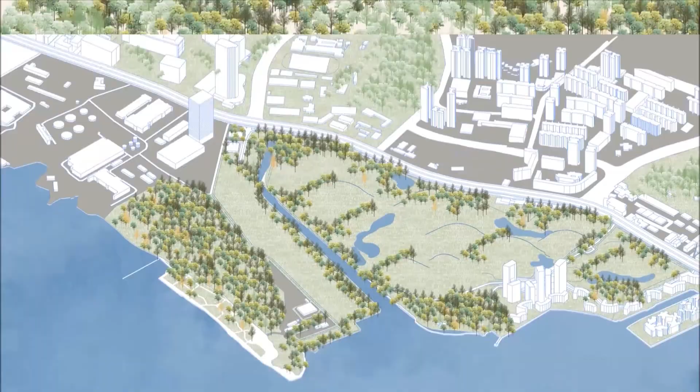The given site is located on the Greater Southern Waterfront, the south coast of Singapore, and consists of three main areas. To overcome the carbon problem, as the root of other environmental issues, we propose the approach: reduce, capture, then reuse. How do we reduce carbon?

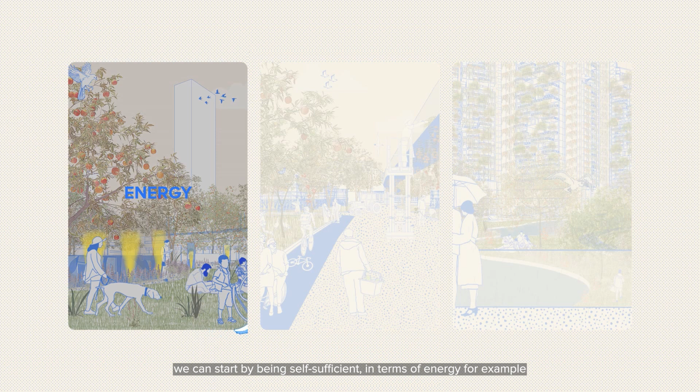We can start by being self-sufficient in terms of energy, for example. The exploration focuses on the building's orientation related to solar radiation and its opportunities to apply passive systems. The units are arranged with gaps to allow natural ventilation and lighting.

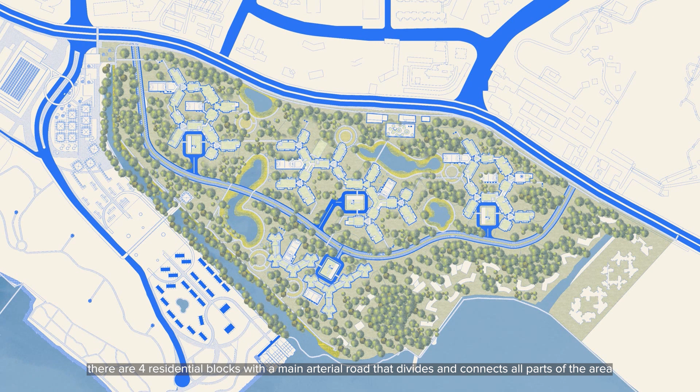There are 4 residential blocks with a main arterial road that divides and connects all parts of the area. The north side is for public housing and the south is for private housing. The concept of diversity and personalization is also implemented on the facade through solar panel application.

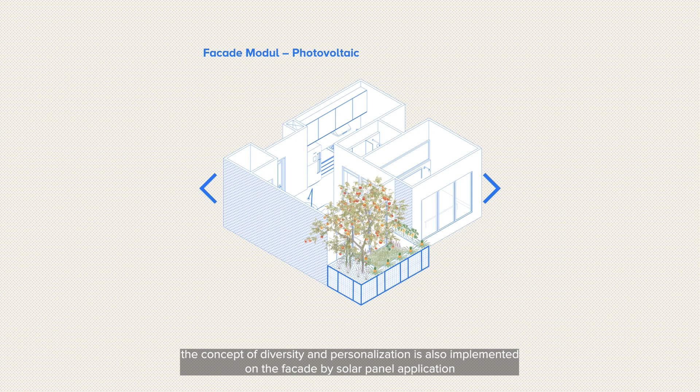Not only that, to meet the resilience scheme, the buildings are equipped with 3 cores that have a special function for distribution of water, waste, and food as well.

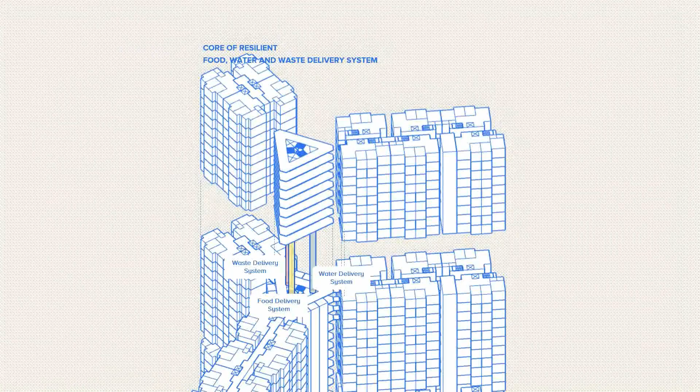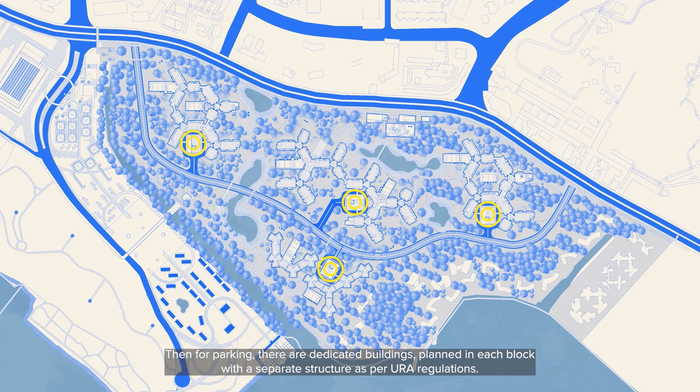Each tower is also equipped with various facilities spread over the podium area. For more dedicated functions, there are building facilities located in the middle area between towers, consisting of a playground area, maintenance rooms, sport fields, storage, and an area for vertical farming. Then for parking, there are dedicated buildings planned in each block with a separate structure as per URA regulations.

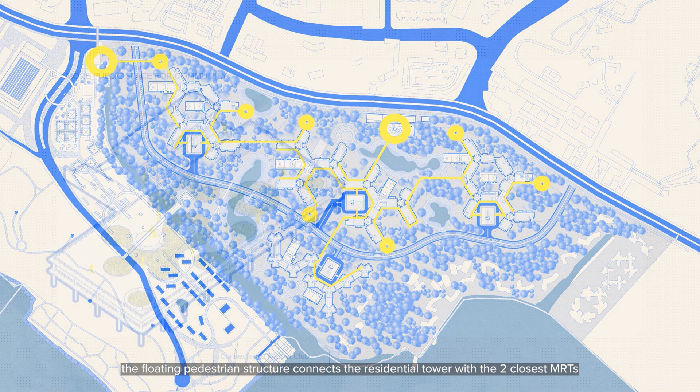We explore the design to consider future development and even function changing. It's then connected to the building at the pedestrian bridge level so it's more accessible. The floating pedestrian structure connects the residential tower with the 2 closest MRT stations. In the area that connects Keppel with the Telok Blangah MRT, there are food stall areas, playgrounds, and public spaces.

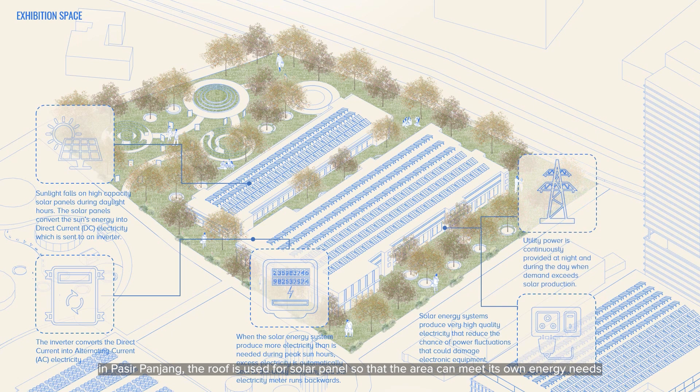In Pasir Panjang, the roof is used for solar panels so that the area can meet its own energy needs. As an exhibition space, energy requirements for installation and supporting display of other works can also be accommodated with this energy scheme.

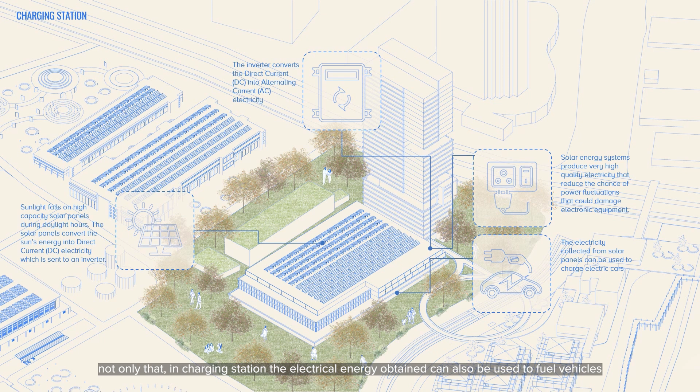Not only that, at the charging station, the electrical energy obtained can also be used to fuel vehicles.

The next aspect is the need for food. This is very crucial for Singapore, which currently imports 90% of its needs. With diverse design alternatives, including some units that have balconies, residents can adjust their preference to occupy daily needs through self-farm methods and a large terrace.

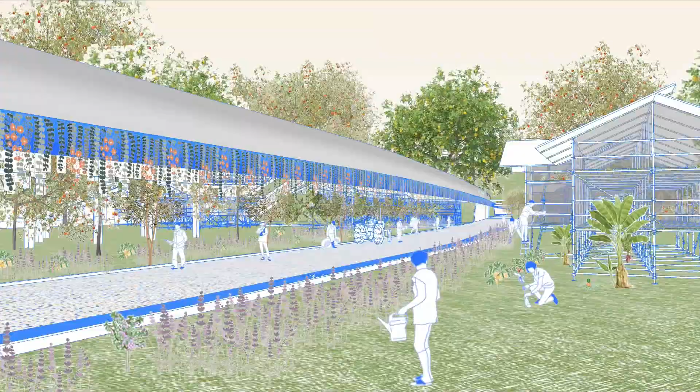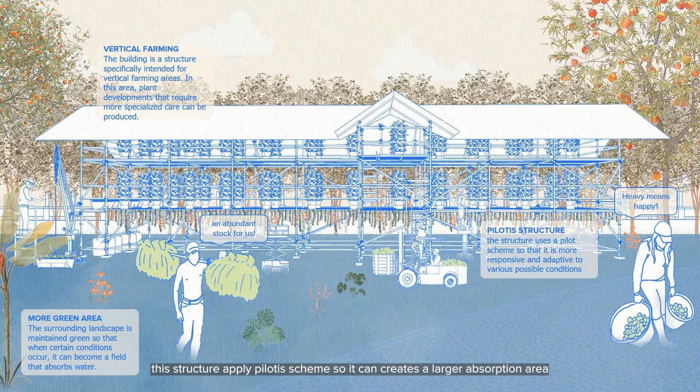On a larger scale, food needs are also supported by dedicated vertical farming buildings in the Labrador area. This structure applies a pilotis scheme so it can create a larger absorption area.

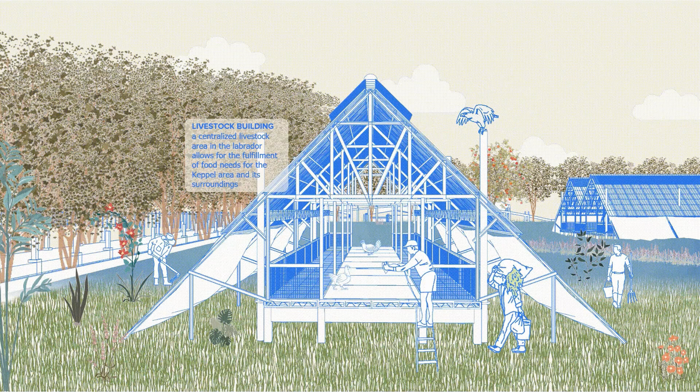Then for the livestock unit, accommodating chickens and pigs, the structure uses an amphibious scheme so that it is adaptive to various conditions that may be unexpected in the future, such as sea level rising and flood.

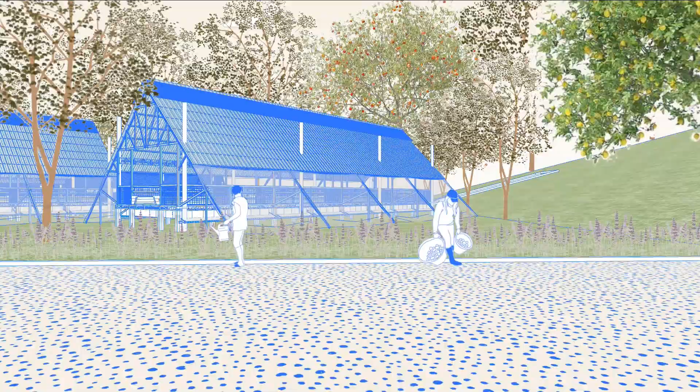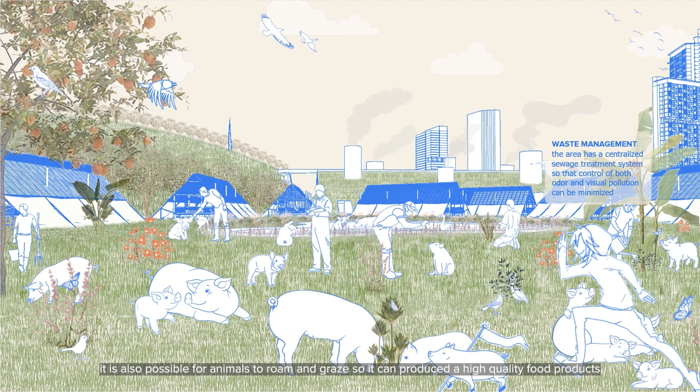With interactive media, visitors can access various information related to the site and the food scheme implemented here. It is also possible for animals to roam and graze, producing high-quality food products. Water, feed, and sewage systems are also particularly designed.

For marine protein needs such as fish, shrimp, and squid, the need is accommodated within aquaculture supported by a desalination scheme. The design is also equipped with a dedicated distribution channel using a conveyor line that covers up to the Keppel area.

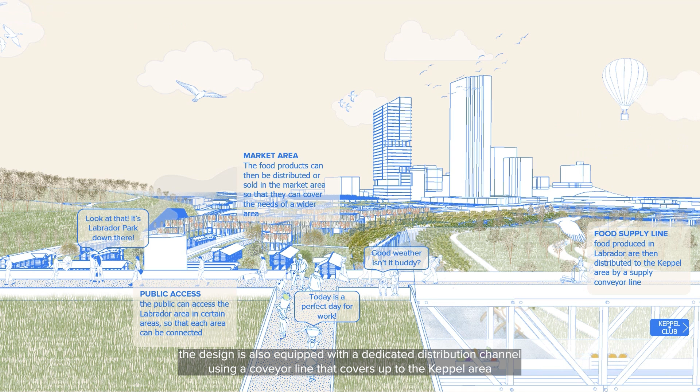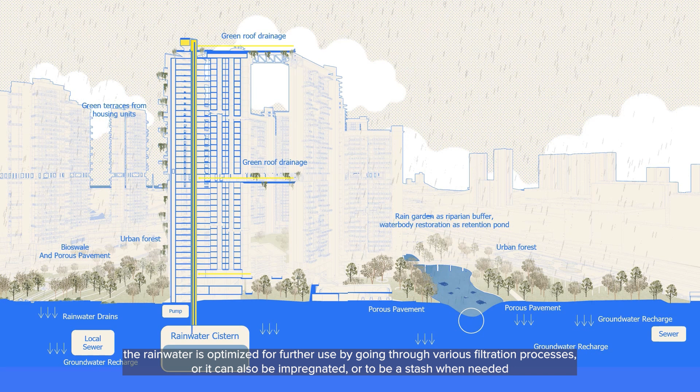Another important issue that needs to be accommodated is the problem of water. Rainwater is optimized for further use by going through various filtration processes, or it can also be impregnated or stashed when needed.

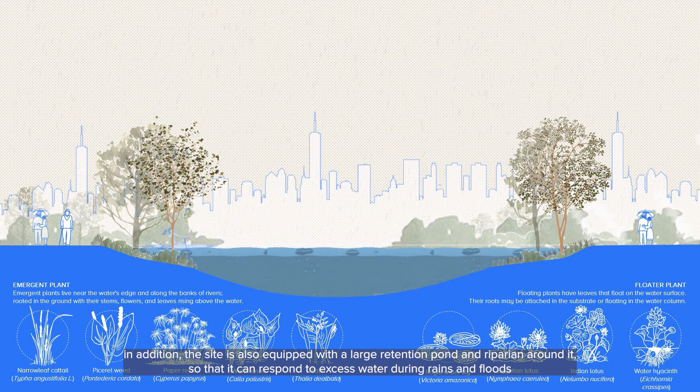In addition, the site is also equipped with a large retention pond and riparian area around it, so it can respond to excess water during rains and floods, and also address conditions of water shortage by making it a catchment area that can store water.

Here, the open area around the retention pond, which is dominated by greenery and active public space, allows people to do jogging, camping, and other outdoor activities.

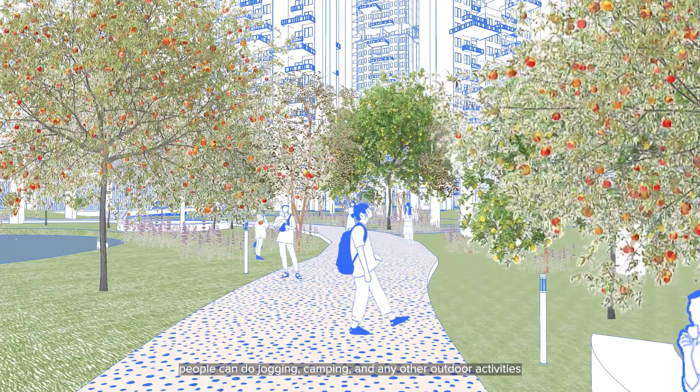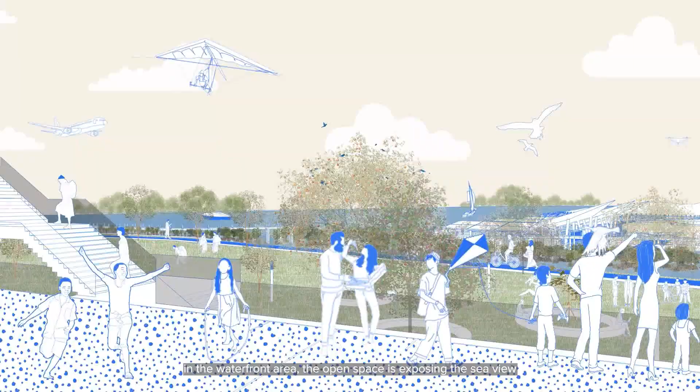In the waterfront area, the open space exposes the sea view. People can also see the Labrador area from here.

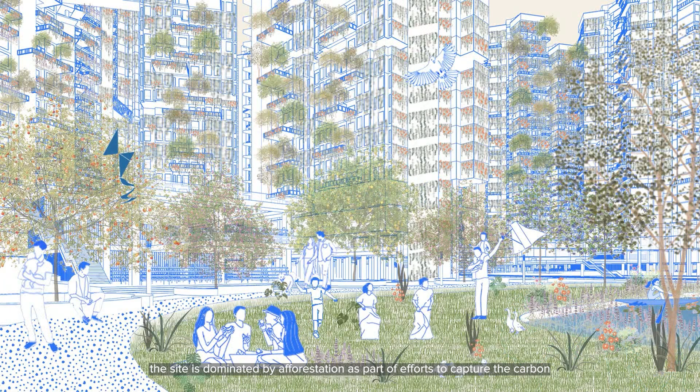In addition to reducing, we are aware that many of our daily activities still produce carbon, so we must capture it. The site is dominated by afforestation as part of the effort to capture carbon.

Besides that, we also realize that the green element cannot be conserved separately. It requires the ecosystem as a whole to support a full and sustainable cycle.

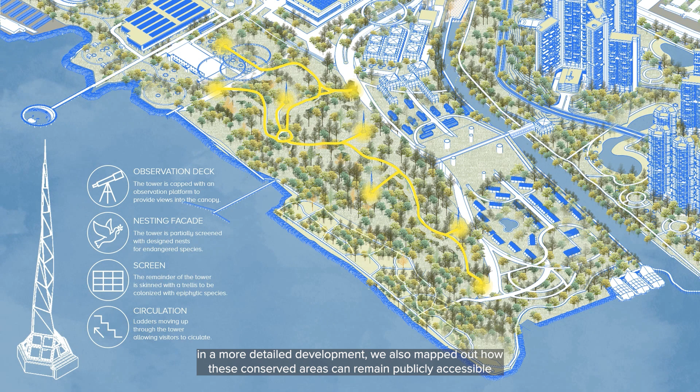In more detailed development, we also map out how this conserved area can remain publicly accessible. An ideal ecosystem where plants, animals, and humans can live synergistically is the target that our proposed design aims to achieve.

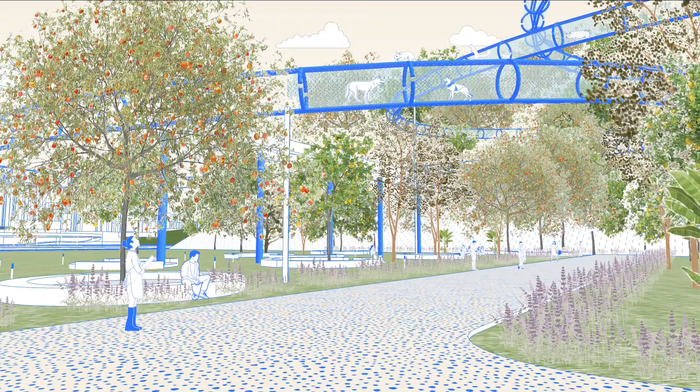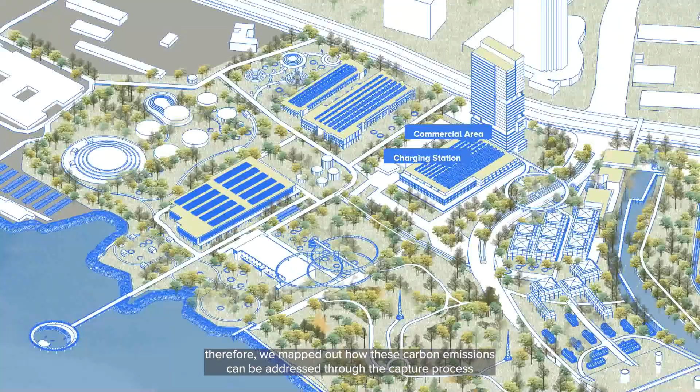Therefore, we map out how this carbon emission can be addressed through this capture process. In addition to natural processes, we also use the CCUS and protocell scheme where carbon can be captured very efficiently.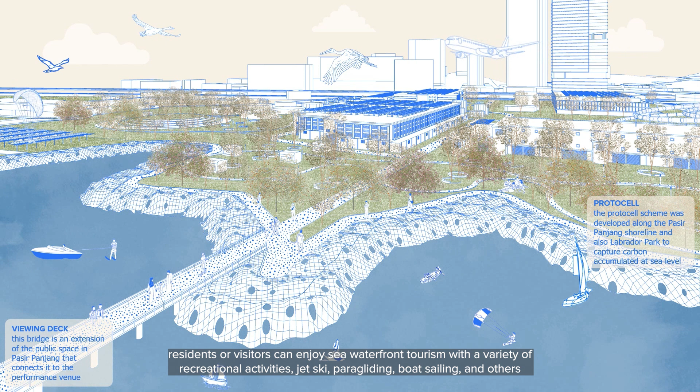Residents or visitors can enjoy sea waterfront tourism with a variety of recreational activities like jet ski, paragliding, boat sailing, and others.

And in the last stage, how can we utilize the carbon that has been captured. For general use, the carbon produced can also be converted into various forms such as benches, lamps, and others.

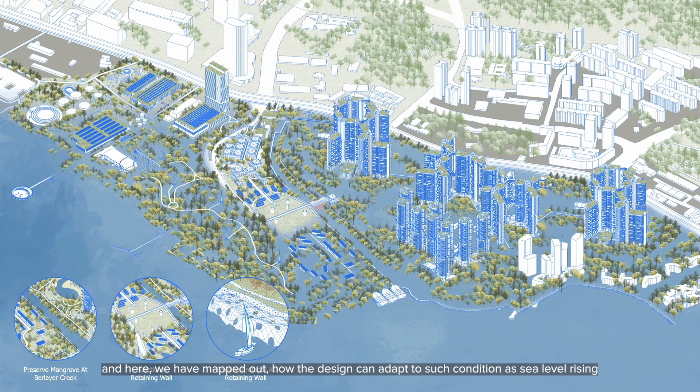But eventually, you still have to adapt. The worst can still happen. And here, we have mapped out how the design can adapt to such conditions as sea level rising. With water catchment areas, it can be resilient to various threats like rainstorms that potentially cause massive flooding.

As Bjarke said, sustainability's goal is to create possibilities, not to limit options. So that's why we do conservation, carbon preservation, and innovation.